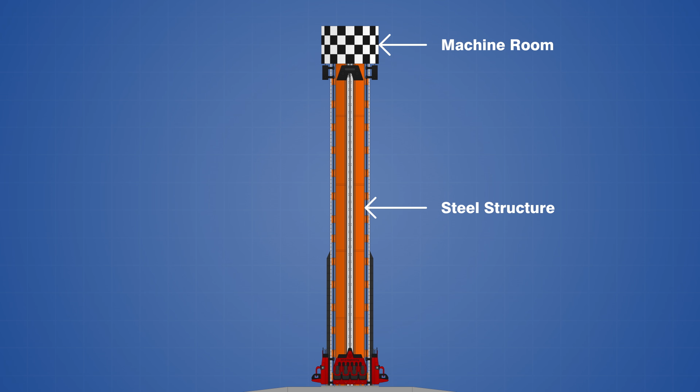The tower itself usually consists of a cylindrical steel structure that is anchored to a large concrete foundation, and this is topped off with a machine room that houses the electric lift motors. Depending on the configuration, there may be a single ride gondola that wraps all the way around the tower, or there may be several smaller gondolas equally spaced around their circumference as shown here.

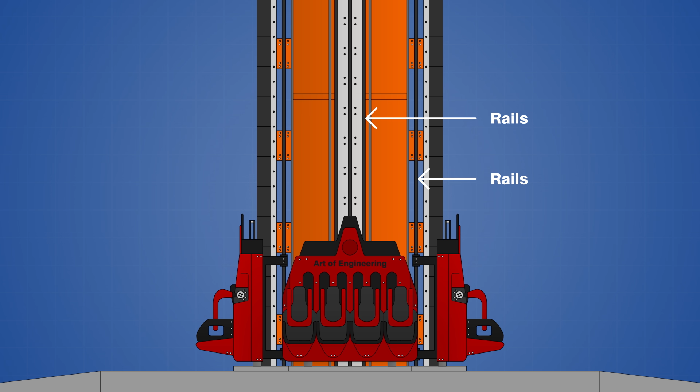The vehicles travel along rails that are fixed to the exterior of the structure, and each one is paired with a catch car that is mounted on the same set of rails above. The catch cars are suspended from the top of the tower with steel cables, and they can be moved up or down independently using the lift motors.

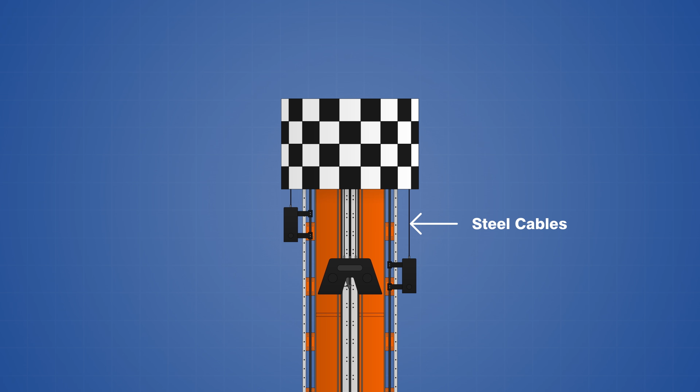When the ride is ready to begin, each catch car is lowered onto the corresponding gondola, where a mechanical latch automatically engages to lock them together. They are then hoisted up to the top of the tower, and when given the all-clear, the latches are disengaged to release the vehicles from the catch cars.

After a brief freefall, the gondolas are brought to a safe and controlled stop by a magnetic braking system, which is both the most important and most innovative part of the whole ride.

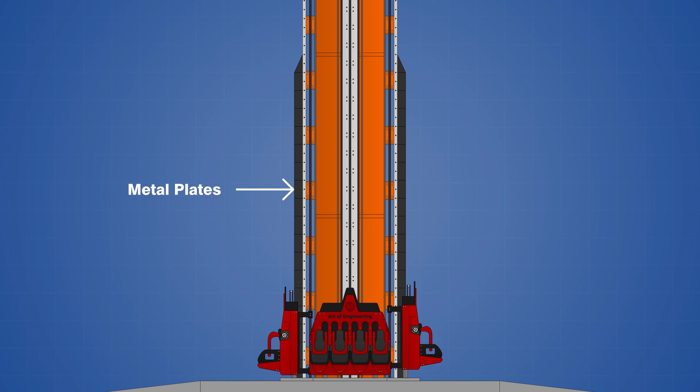At the bottom of the tower, there are 2 rows of inert metal plates that run parallel to each set of rails, and these align with permanent rare earth magnets that are mounted to the ride vehicles. Each gondola has 4 strips of magnets, and they are arranged in pairs to create 2 thin gaps that are just wide enough for the plates to pass through.

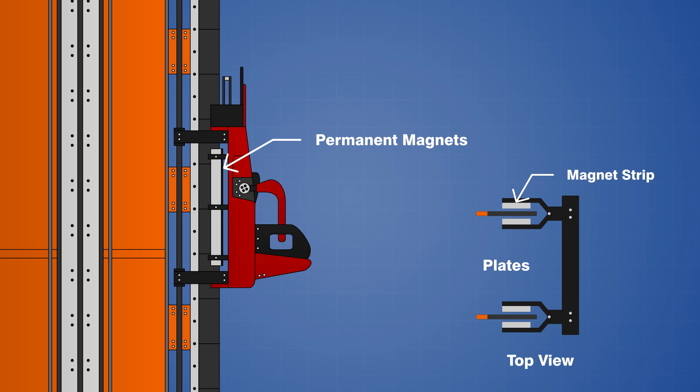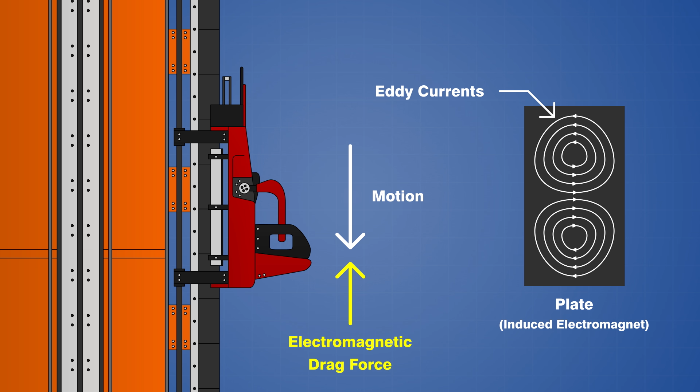When a gondola drops down the tower, the moving magnetic field induces closed loops of electric current in the plates called eddy currents, and these generate their own temporary magnetic field that opposes the motion of the permanent magnets. The result is a magnetic drag force that acts on the gondola opposite to its direction of travel, which is similar to the repulsive force that you can feel when trying to push 2 magnets together with matching poles.

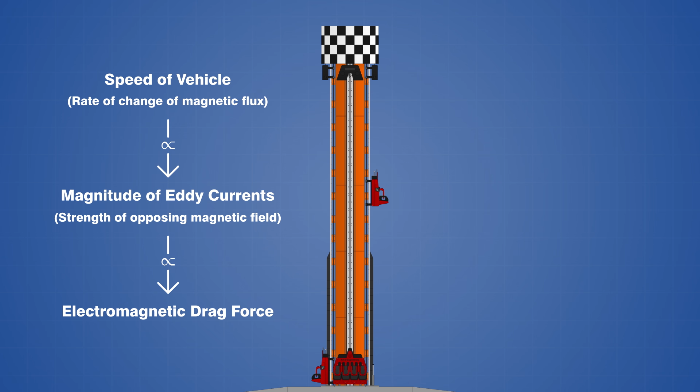The magnitude of the drag force is directly proportional to the amount of current flowing through the plates, since this determines the strength of the opposing magnetic field, and the amount of current is proportional to the speed of the vehicle. What this relationship tells us is that the braking force will be highest when the permanent magnets just begin to pass over the plates, and the force will decrease as the gondola loses speed, thus providing a smooth deceleration.

This method of magnetic braking is commonly referred to as eddy current braking, and it is used quite frequently in the amusement industry because it converts kinetic energy directly to heat without any need for moving parts or frictional wear. The system is also completely fail-safe because it does not rely on an external power source, and the brakes will still function in the event of a power outage.

The only real downside is that magnetic brakes cannot bring the ride to a complete stop all on their own, since there will be a point during the deceleration when the magnetic drag force perfectly balances the force of gravity, and the gondolas will continue to move downward at a slow but constant velocity.

In order to prevent a hard landing on the ground, the ride vehicles simply touch down on hydraulic cylinders that are positioned around the base of the tower, which absorb the remaining kinetic energy. Overall, this type of electromagnetic drop tower is a safe and dependable ride that is still popular today.

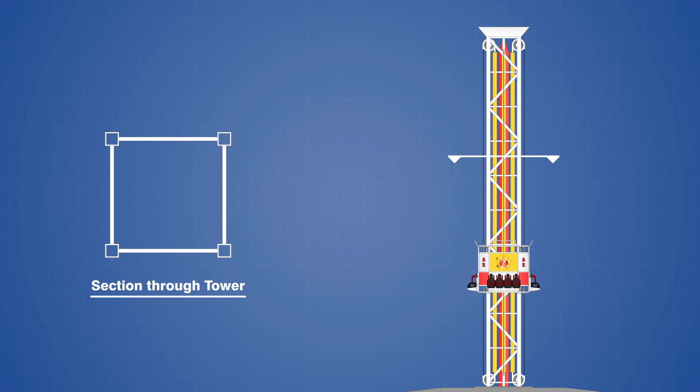However, it wasn't long after Intamin introduced it that American ride manufacturer S&S developed their own system using compressed air. These towers usually have a steel truss structure with a square cross-section, and the ride gondola travels along the four corners with small guide wheels, so there is no need for external rails.

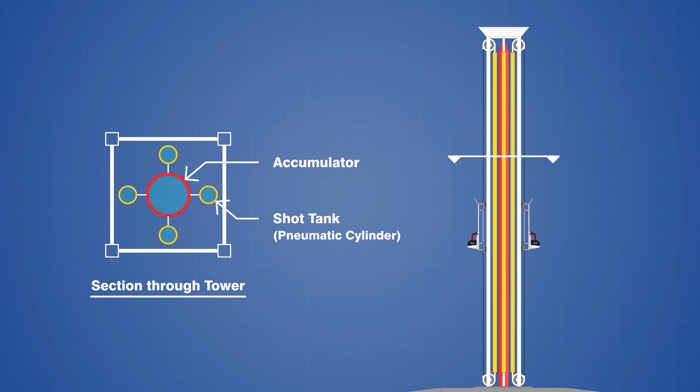Inside the tower is a massive air accumulator, which is basically a storage tank that can hold air under high pressure, and it is surrounded by four smaller pneumatic cylinders called shot tanks. Each cylinder contains a piston that can travel up and down, and this is connected to a steel cable that exits through small seals at the top and bottom.

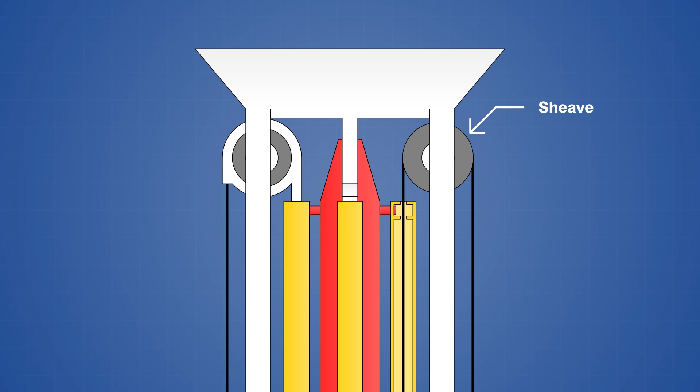The cable passes around a sheave at each end of the tower, where it then connects to the gondola, thus forming a closed loop around the outside of the structure. As the four pistons move in one direction on the inside of the tower, they pull the cables around the sheaves and drive the vehicle in the opposite direction on the outside.

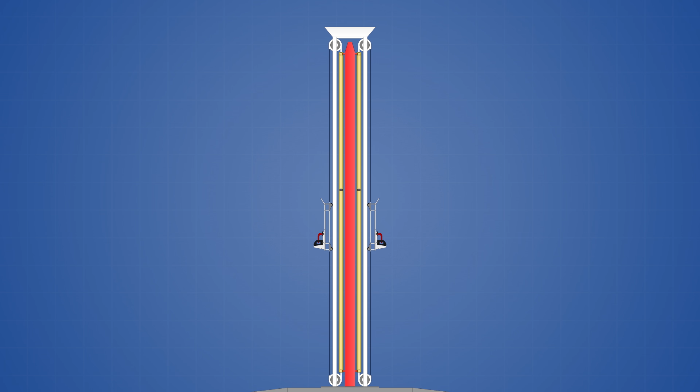When the system is depressurized, the gondola will naturally rest at ground level while the pistons are raised to the top of the shot tanks, and this is how each ride cycle begins.

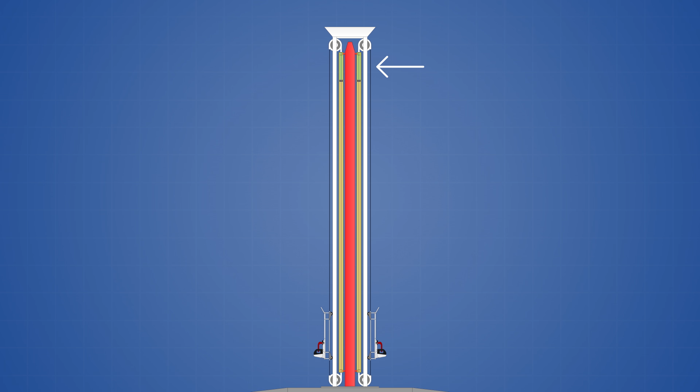Once passengers are loaded, a small amount of air is moved from the accumulator into the top of the pneumatic cylinders, which pushes the pistons down and lifts the vehicle. The ride computer then weighs the vehicle by measuring how much air pressure is required to balance it, and this determines how much air will be used to achieve the desired speed and g-force.

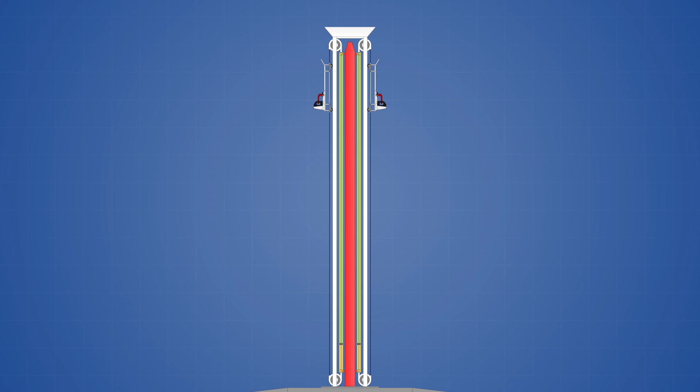Additional air is then released into the cylinders to lift the gondola to the top of the tower, where it locks into a mechanical brake that holds it in place before the drop. At this point, the accumulator is pressurized to its full operating pressure by moving air from an external receiver tank, which is paired with a large air compressor and drying system in a separate building.

When the ride is launched, the compressed air in the accumulator is released into the bottom of the shot tanks, which shoots the pistons upward, releasing the holding brake and driving the gondola down towards the ground.

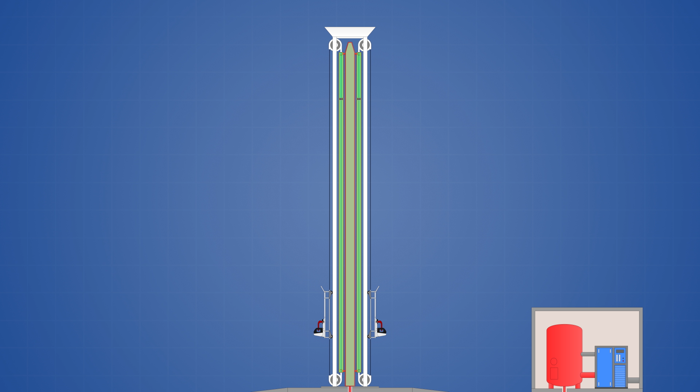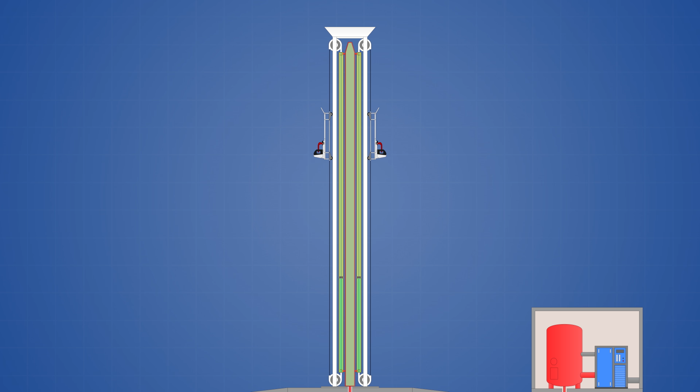As the pistons approach the top of the tower, the air in the top portion of the shot tanks becomes compressed, thus absorbing the kinetic energy and slowing the gondola down before bouncing it in the reverse direction just like a compressed spring. The pistons and gondola then oscillate up and down several times as the motion is dampened by slowly releasing air from the cylinders, and the vehicle is lowered back to the starting position once the system is depressurized.

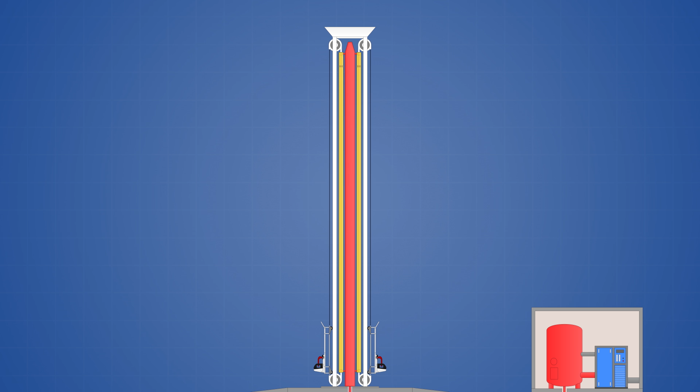One of the benefits of using compressed air for a drop tower is that the entire ride is controlled by a single pneumatic system that does not require separate mechanisms for lifting and braking, yet the redundancy of having multiple cylinders and cables still ensures that the ride is fail-safe.

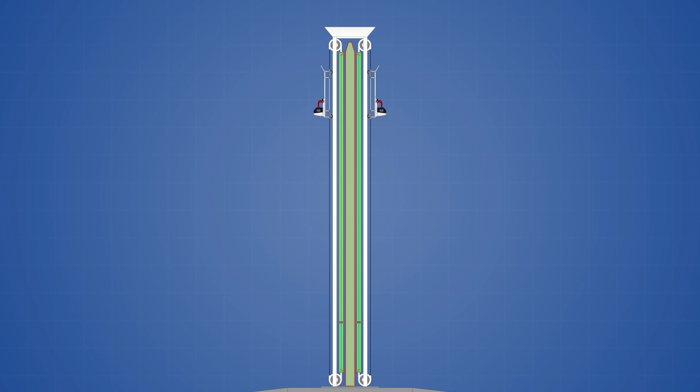The intensity of the ride can also be adjusted by varying the amount of air that is used for each launch, making it possible to achieve a drop that is nearly twice as fast as a freefall. The launch can even be reversed by releasing compressed air into the top of the shot tanks instead of the bottom, shooting the gondola up the tower with an acceleration in excess of 4 Gs.

Regardless of the underlying ride system, electromagnetic and pneumatic drop towers both offer intense thrills that are unmatched by any other ride, making them popular installations at amusement parks all around the world. And while the experience of riding a drop tower may be terrifying, you can be assured that these rides are always designed with guest safety in mind first.